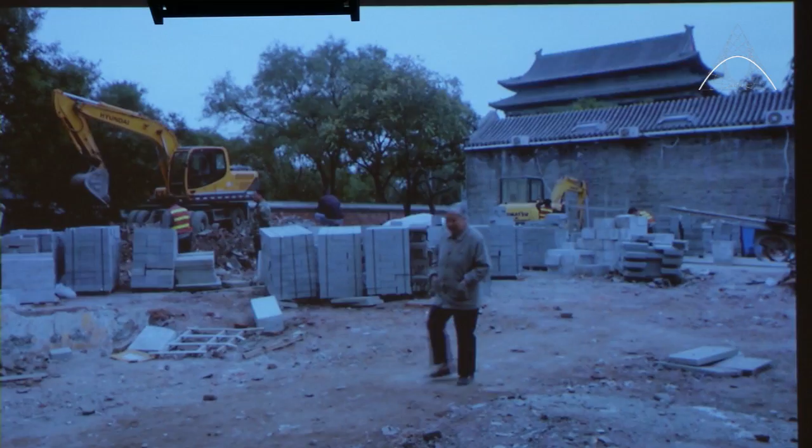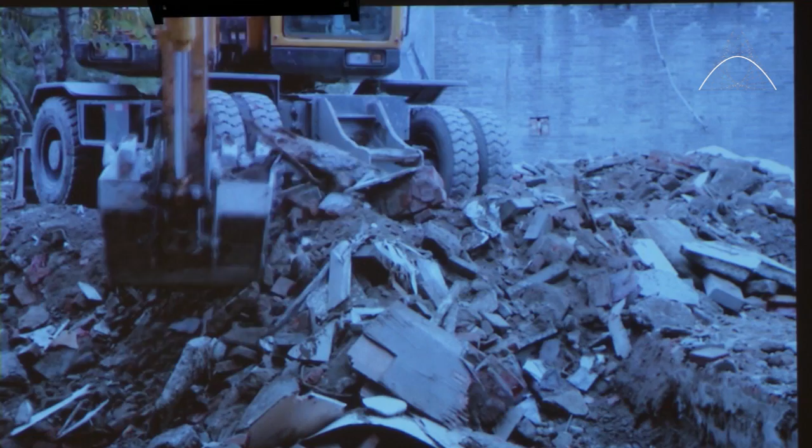Everything in China is huge. They just dig up things and destroy things, and it's an issue of practicality. There's such a need, such an effort to do any of this that this kind of blanket way of doing things is the only practical way people have at the moment. That would be razing buildings, putting in new roads or sewage lines or electricity. Once that policy is in place, it's all done at once. It's over. It's drastic, it's traumatic.

In Dashilar, you have courtyards like this, where families have been here for really hundreds of years. This courtyard is literally about 300 years old. The family that used to live here, they don't live here, but they have a shop that's just at the front of this courtyard house. They're not willing to leave this area. They still have their roots here, and even though this courtyard is not necessarily a place where they live anymore, it still has a lot of sentimental value for them.

The reason why they're not being used is because it would cost a lot of money to renovate. Not just that, the most difficult thing is no one would be willing to renovate something that is partially used by other people. Our approach was to not change as much as possible.

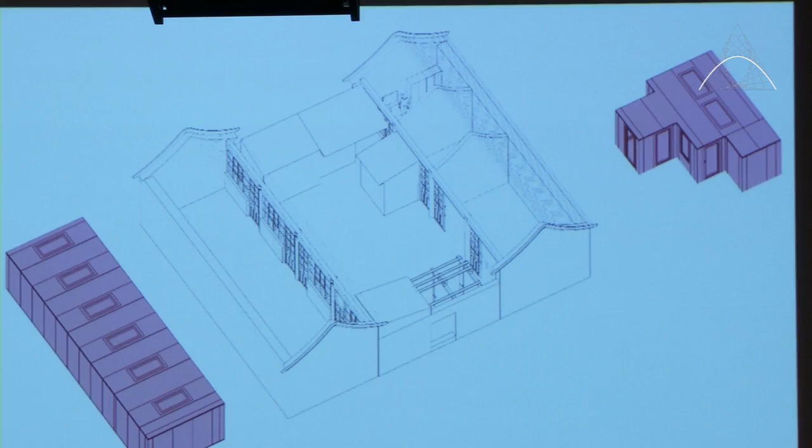Our project is literally inserted into the old house. You can think of it as a house within a house. So it's made up of modules, these panels, and they're fitted together like IKEA furniture. They're standardized parts with a hex wrench. You just, with a twist, lock everything together, and it becomes airtight, waterproof.

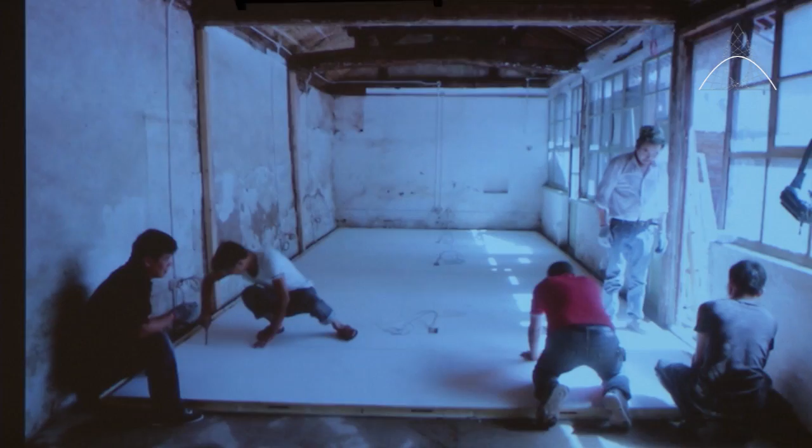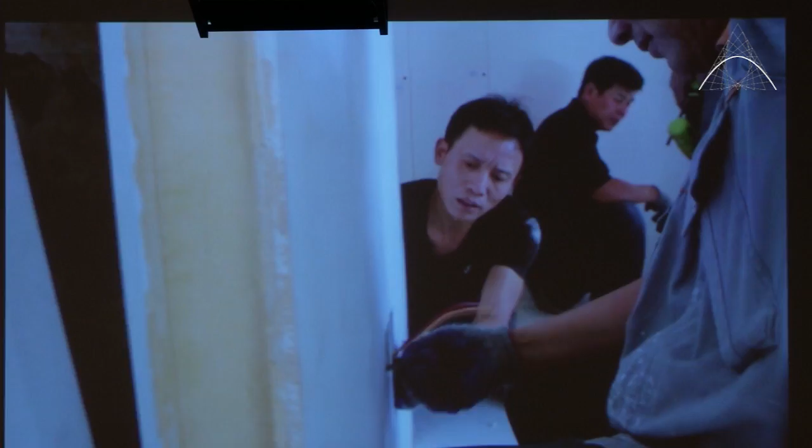Each panel is prefabricated, made in a factory, in a production line. Packed up, shipped over here. Each panel has insulation, structure, kind of a drywall type of material on the interior, and has an exterior surface that is sheet metal. All this is molded all at once. The wiring and the plumbing and everything is integrated into the panels. So by doing that, we're able to really reduce the cost of production.

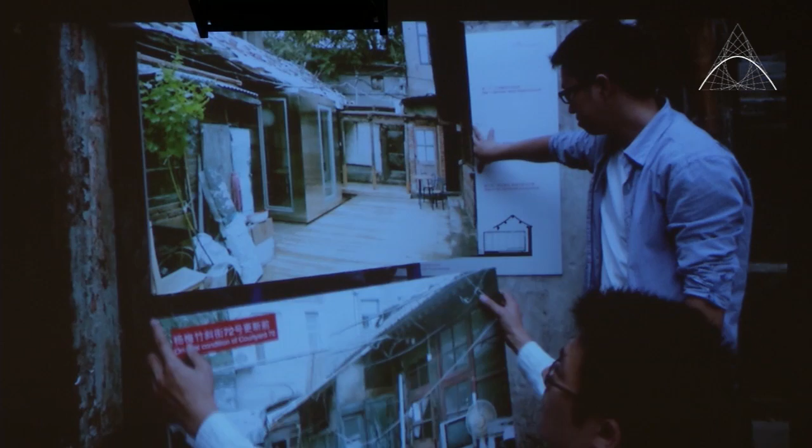To estimate the cost, we're comparing things that offer equal living standards. So that means it has to be equally energy efficient. Our panel system costs about 400 RMB per square meter, about half or even less than that of renovating the old structure. And rebuilding from scratch would cost probably 4 or 5 times that.

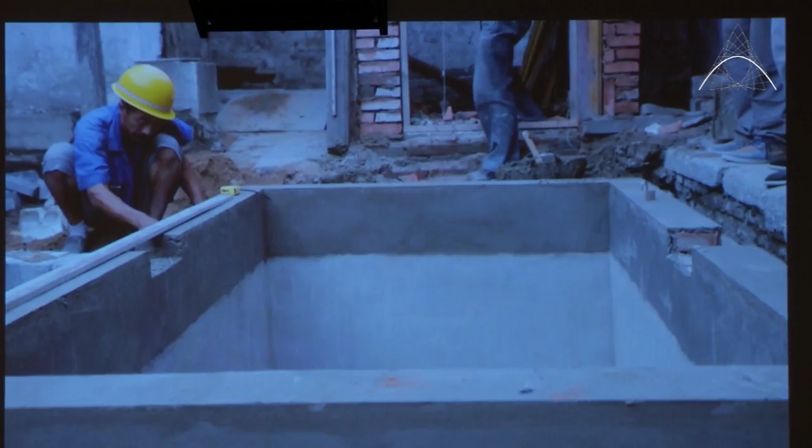Each house, the north house and the south house, took less than a day to build. It took a little bit more time to just paint things and to put in the flooring and connect the wiring. What happens after this can be pretty broad.

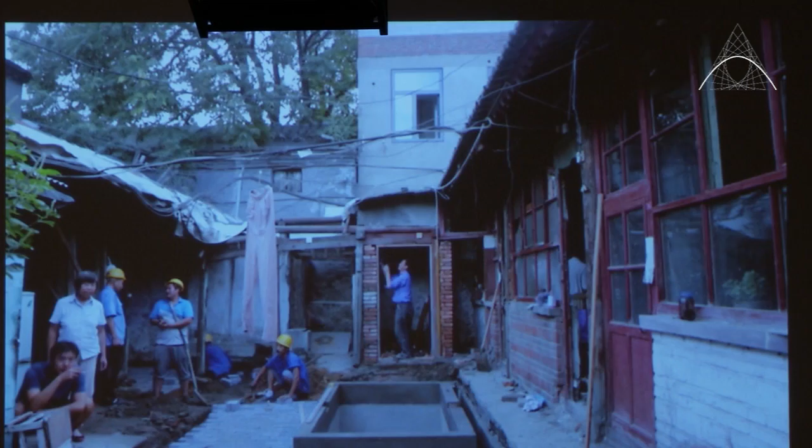But the whole reason of having this is to test out a first prototype for use in other courtyard houses. It could be used for offices, it could be used for living. But in all these cases, it would provide you with all the modern amenities that you require. The value of keeping a lot of this old structure is the things that happened here. These places are places you can't find anywhere else in the world. There's no reason why it can't be woven with our modern way of life.

What you saw was about 2 years ago, our first Courtyard House plugin, part of a pilot in an area called Dashilar in Beijing. These are plug-in panels, designed as modular prefabricated components that can be transported by hand into these very narrow alleyways that make up these old neighborhoods in Beijing. They have to wind through small areas and very small doorways, and the buildings are constructed from the inside.

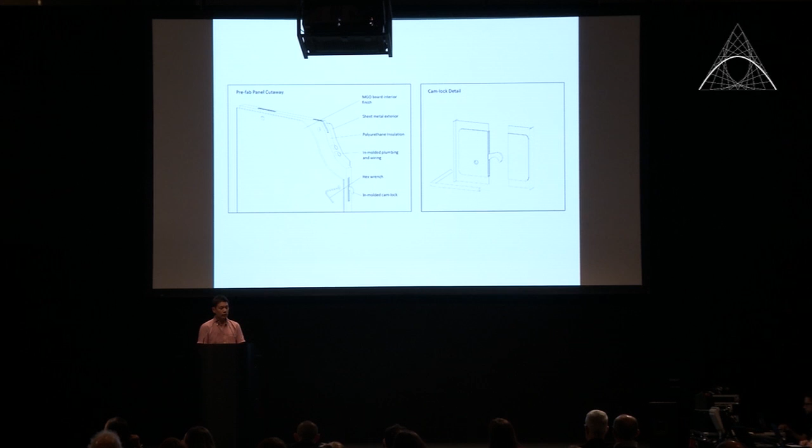The panels are designed and developed by us. This is not something you can find on the market, it's proprietary. We started from the most basic components to solve these very basic problems. The panels consist of a composite, mostly polyurethane insulation as the core, with no additional structure - its strength comes from being a composite. The interior surface is MgO, magnesium oxide board, and the outside is sheet metal. The whole thing is molded in one piece, integrated with wiring and so on. We also integrate cam locks into these panels, so with a twist, everything comes together.

Now these panels are extremely energy efficient. One of the biggest issues with these areas is that the houses are very old and don't do much to insulate. These panels are about 10 times as energy efficient as traditional courtyard houses, and the standards we're meeting are twice the standards of the city of Beijing. Also because we're using this kind of lock, the entire structure is very well sealed. So with one tool and a few unskilled people, you can build a new house in just one day, for a fraction of the cost of a typical renovation - less than half the cost.

These neighborhoods are very old, several centuries old, and they've gone through quite a tumultuous history, as you can imagine, in China. This history is shown in these buildings - you can see the layers of history, the traces of them. And because of this, these communities are extremely tight-knit. Over time, these neighborhoods have really started to degrade from overcrowding and neglect.

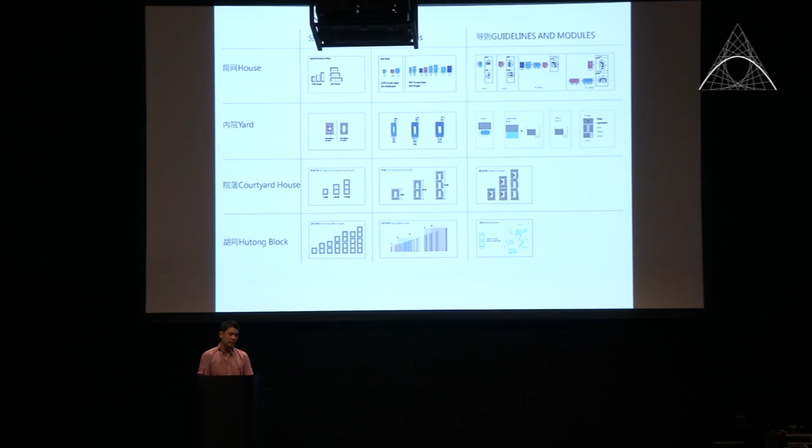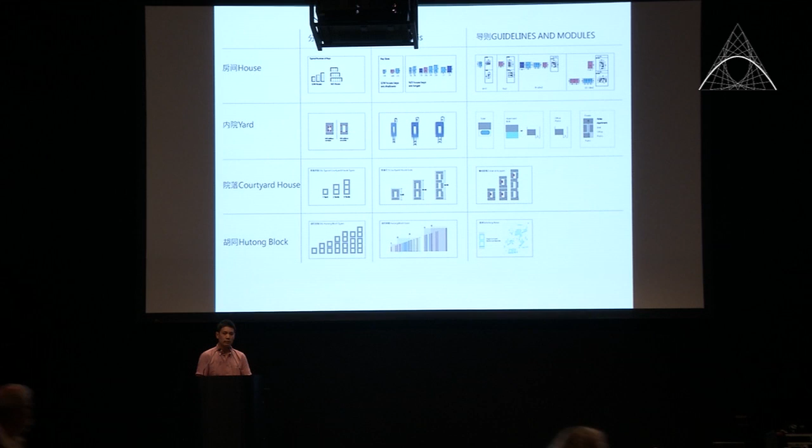Our plug-in system is really designed as an urban solution - it's not meant to be used on a case-to-case basis. So we designed a whole series of guidelines and a manual on how you would actually use this system. We also went in and surveyed the whole area, and we have all this information in the computer. We went out and planned what spaces would be best used for what kind of programs - some for residential use, some for office use, and so on. We came up with a whole series of guidelines for that.

Now this is a map of the area and our master plan of it. Everything that you see in color - it's a little bit fuzzy here - are vacant spaces. So there's a lot of that here.

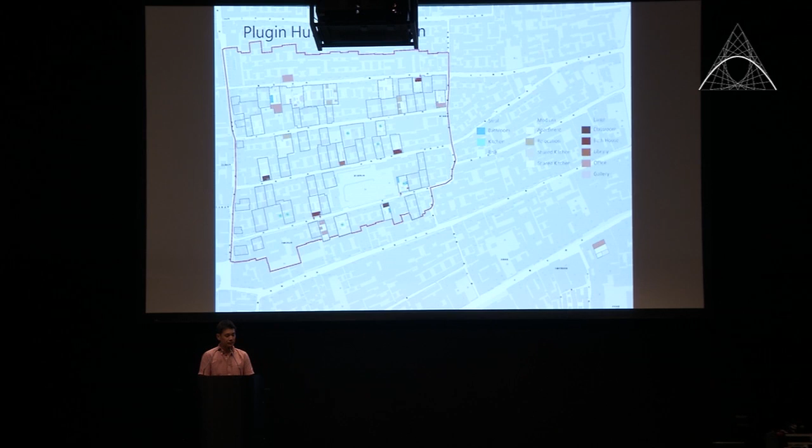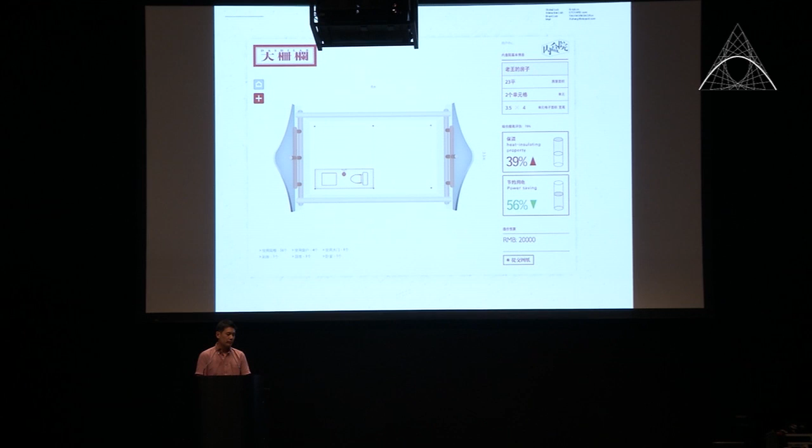We also wanted to direct the system to locals being able to engage in this whole process themselves. So we have this software that's online and live now, where local residents can put in different modules, such as new bathrooms or bedrooms, and adjust their own layout. The software will calculate how much energy savings they'll have, how much it'll cost. They're able to see immediately some of the benefits of using this.

We also try to be really creative with our system. We didn't want it to just be something too much of an off-the-shelf kind of thing. We've really taken advantage of these plug-in panels, their lightness and flexibility, trying to open up the interiors to these courtyards.

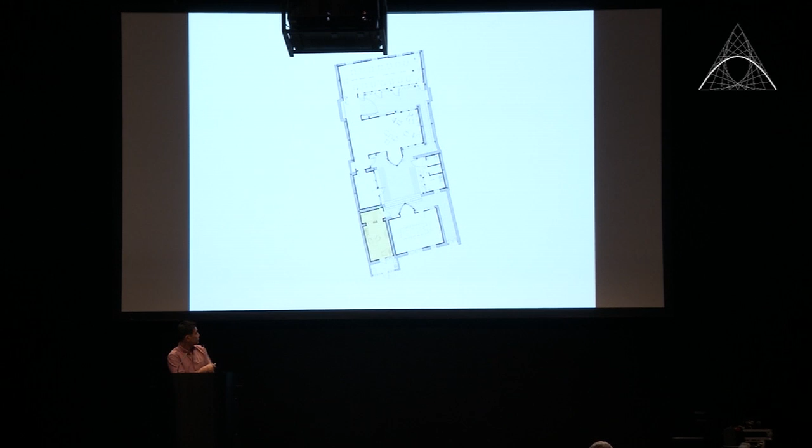This is again our office. This part is our office. This is a community center, and this is a local resident that basically grew up here.

Aside from really trying to make these spaces more livable, we believe it's really beneficial to have such a variety of different types of people and different uses all in one courtyard house. We don't do any projects that are completely empty courtyard houses. We think those are very easy to do, and usually they're bought up by wealthy people, but in these cases, these spaces are usually just left empty.

Mr. Song lives with his daughter, and they used to live in just this one little space, about 20 square meters. What we did for them was add a mezzanine level, so now she can have her own space, and he has his own space.

She's really taken to the house and has done some interior design, which I would never be able to do, but I'm very happy to see what she's done.

And this is Miss Dong's house, the lady with the shower. Here, she can tell you a little bit about her experience and her plug-in.